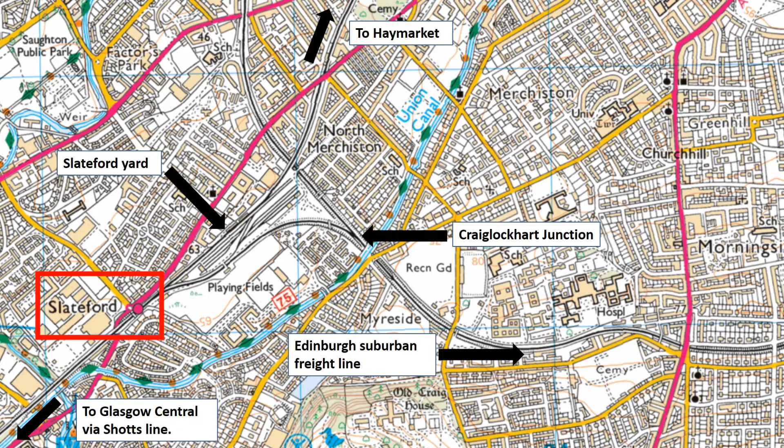Today we're going to look at the junction at Slateford Station, which connects the line via the Craiglockhart Junction to the Edinburgh suburban line, which is commonly used for freight movements and for bypassing the city centre.

A platform gauge is used to help set the platform coping stones to the track. It achieves this by measuring both the height and the distance from the outside rail running edge on a level between both rails. It can be used to both set the platform stones or check and measure their actual dimensions.

The platform gauge is both rigid and stable, whilst light and manageable as possible. It has handles and is balanced to enable one person to manoeuvre and operate it, with clear, simple and precise ruler settings. The gauge can be used with no fear of making electrical signalling contact between the two rails, so it will not affect any signalling equipment.

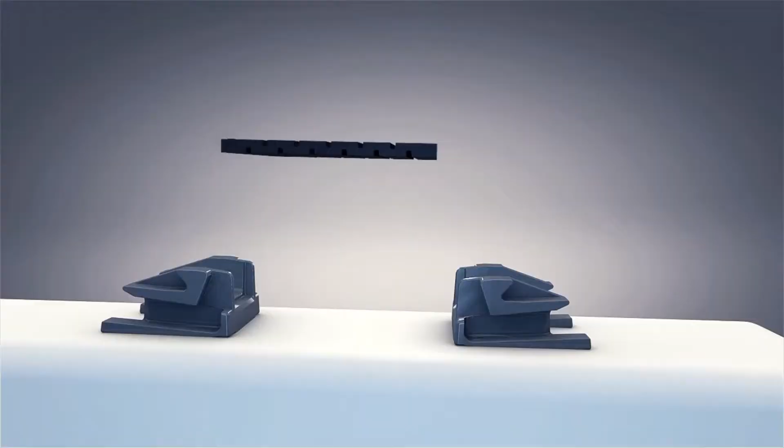You can see the track construction. They're using concrete sleepers here with fast clips. In the next couple of videos, I'm going to show you how the fast clips are constructed and also give you an example of a machine that could be used to install them on site. Note that the video of the machine is using steel sleepers rather than concrete sleepers, but the principle is similar.

Here you can see a drawing showing the layout of the signalling at Slateford Station, Slateford Junction, part of Slateford Yard, and then eventually Craiglockhart Junction, and then the site of the Craiglockhart Tunnel and the old Craiglockhart Station.

If we go back to the top right and look just to the left of the signal, we'll see a grey box with the numbers 249B, and this is the first of the S&C units that allows the trains to pass over onto the wrong side of the track via 249A, past the ground signal ES977, and then through S&C unit 248 across Slateford Junction.

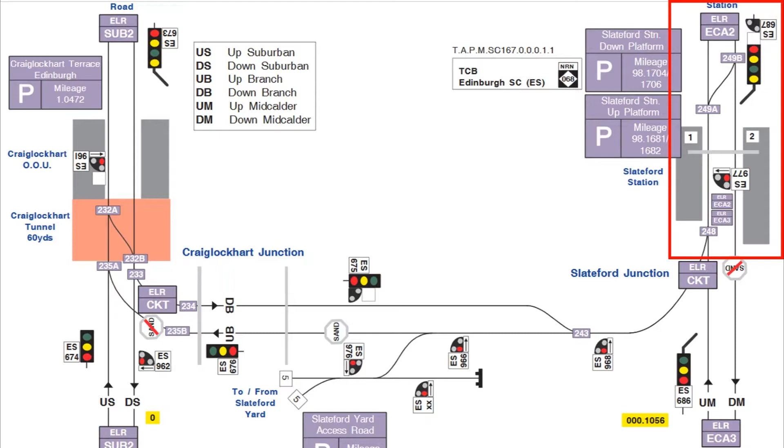So I've just rotated the image, and if you look down at the bottom left, the train's approaching the junction, passing signal ES687. They then cross over to run on the wrong side of the track past the ground position signal ES977, which shows the direction of that ground signal, across S&C unit 248 across Slateford Junction.

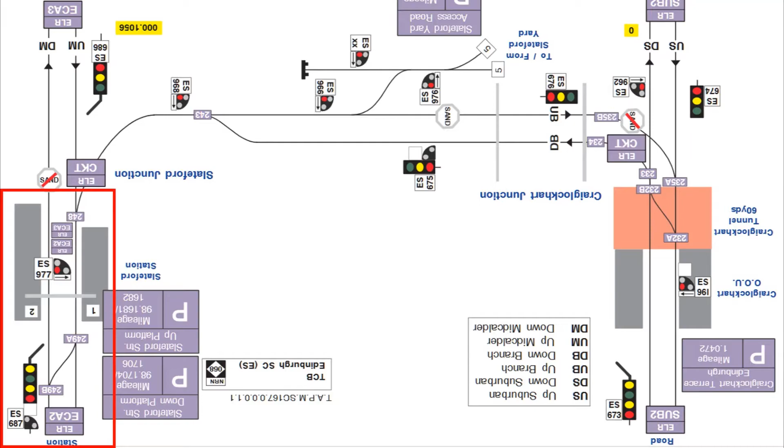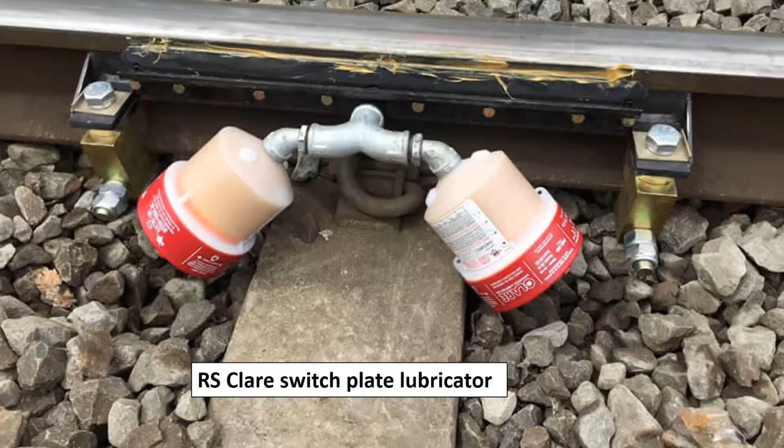This is a switch plate lubricator. Maintaining smooth switch performance is key to the safe and efficient operation of any rail system. High frequency use, coupled with wear and tear caused by mechanical movement, means that specialist switch plate lubrication is essential.

So as we walk up the track here, we can see the first ground position signal. If you look down at the bottom left, you'll see the lubricator. Then we can see the motor, the heater, the switch rails, the check rails, the stretcher bars and the rods. And again, there's the Clare lubricator.

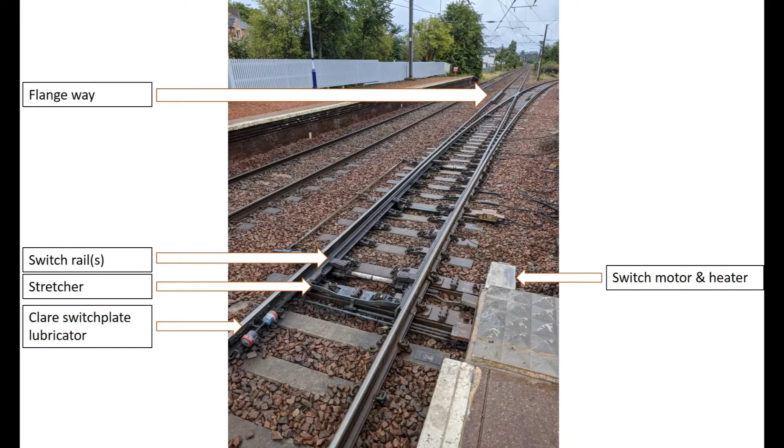The images shown here show S&C unit 248 close up, and what I've done is just annotate some of the major components to help you identify these when eventually you're on site and help you with your terminology. I've also now included a short video from Network Rail which helps explain the various components of an S&C unit and how they operate and why we need them on the railways.

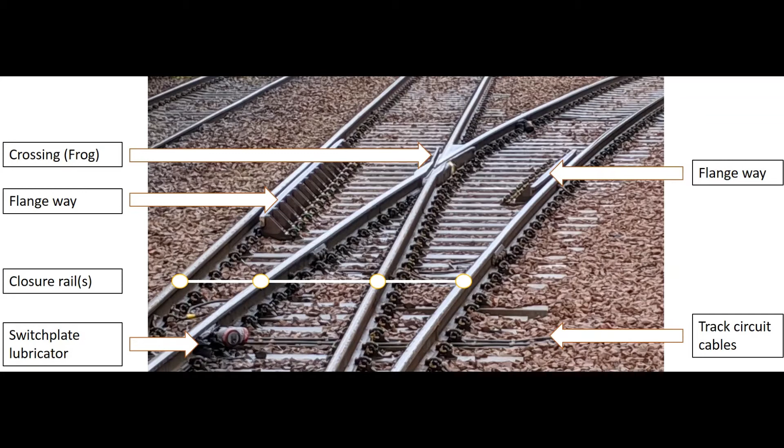Switches and crossings play an essential role in connecting the rail network. We use them to guide trains from one track to another and to enable lines to cross paths. Put simply, they're the junctions that allow us to create a multi-lined, multi-routed rail network.

At Network Rail, we own over 20,000 switch and crossing units. They come in many different shapes and sizes, and all are made to measure for their specific location.

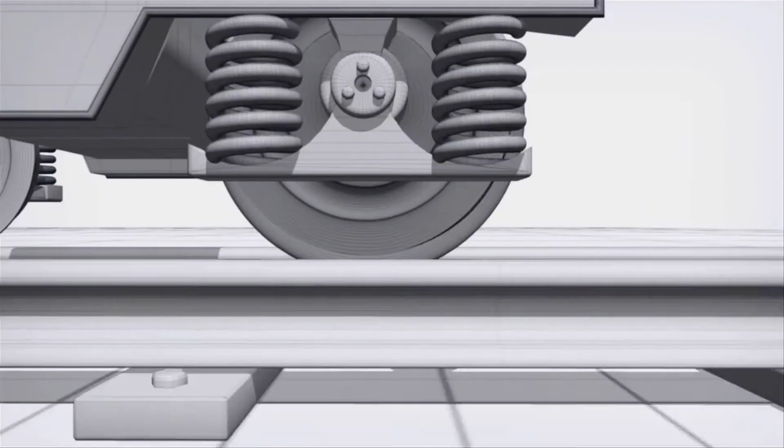To understand how switches and crossings work, we first have to look at the wheel-rail interaction. Train wheels move along the rails guided only by the pound coin-sized area of wheel that sits on the railhead. The wheel rim, or flange, doesn't normally touch the rail. Flanges are only a last resort to prevent the wheels becoming derailed.

A switch can guide a wheel in one of two directions. A crossing creates a gap in the rail for the flange to pass through.

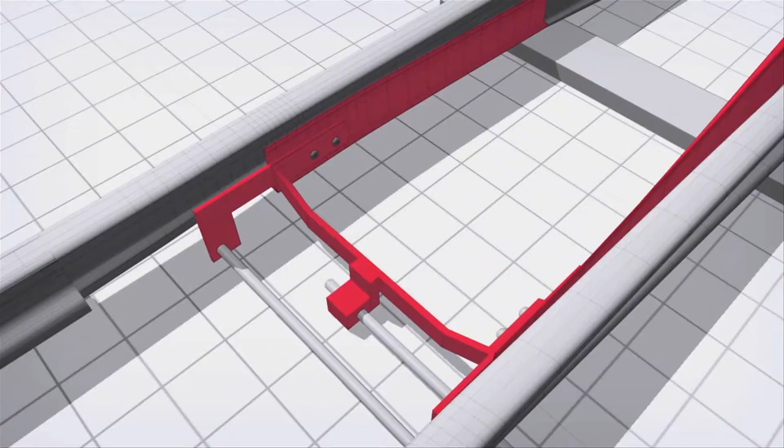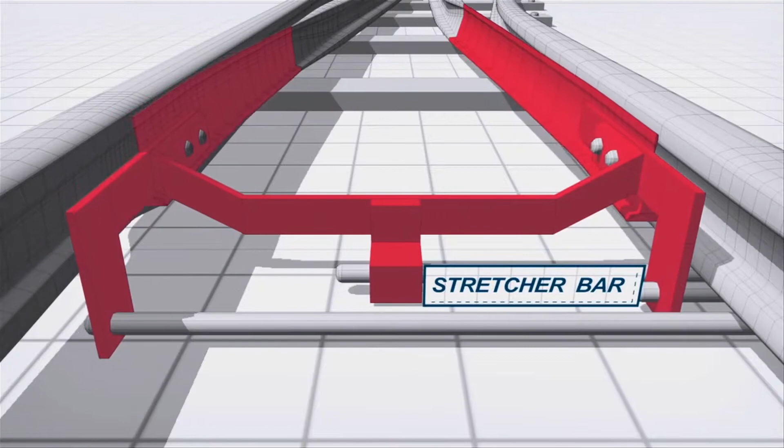This is a switch. Also known as a point, it's the moving part of the switch and crossing layout, and is made up of two long blades which can move across to guide the train one way or another. This is the switch rail, and this is called the toe. This is called the stock rail, a non-moving part of the switch. The two switch blades are fixed to each other by a stretcher bar to ensure that when one is against its stock rail, the other is fully clear and will provide room for the wheel flange to pass through cleanly.

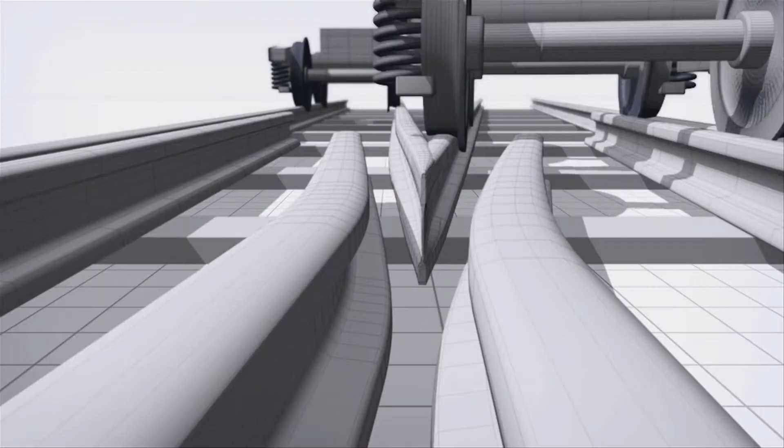This is a crossing. It's the non-moving part of the switch and crossing layout that allows a train to pass in either direction once the switch has been set. This is the nose of the crossing. Either side of the crossing area, wing and check rails are provided to assist the guidance of the wheel sets through the crossing.

Crossings can be either fabricated, made up of two machined rails joined together, or they can be cast as a single unit. Modern crossings are now cast from manganese steel, which is an advanced alloy that gets harder with use. This is an important property, as the nose of the crossing can take high impact loads as train wheels pass through.

My name's Lawrence Walton and I'm a graduate engineer working for Network Rail. I'm here today to teach you about switches and crossings.

The most simple form of S&C is the turnout. This is a left-hand turnout. As you can see, it diverges from the main route in a leftward direction.

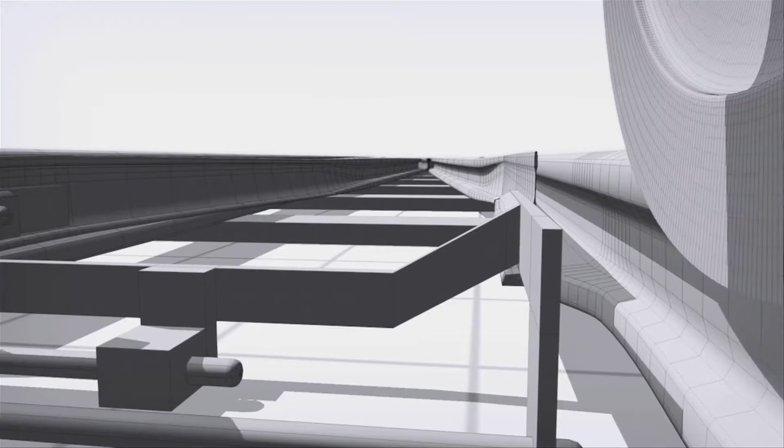This is how it works. In normal mode, the left-hand wheel rolls along the switch rail, and there's flangeway clearance for the right wheel to continue along the stock rail. The inside surface of the right flange is kept on course by the check rail.

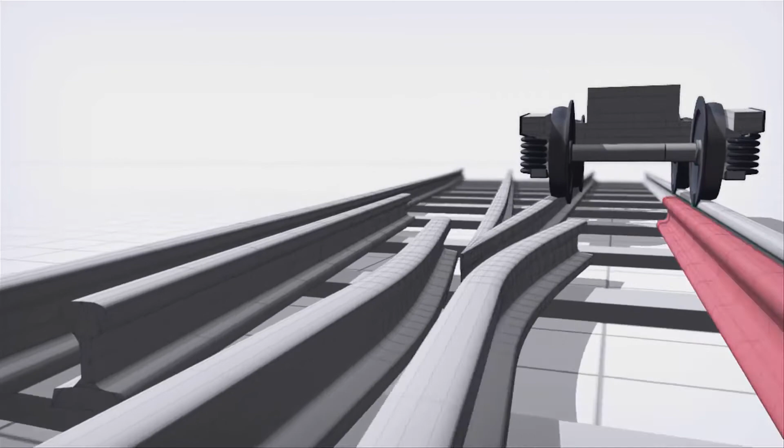This restrains the wheel set and ensures it is directed along the correct route. Meanwhile, the left wheel transfers contact between the different parts of the crossing. That's where there's a high impact load.

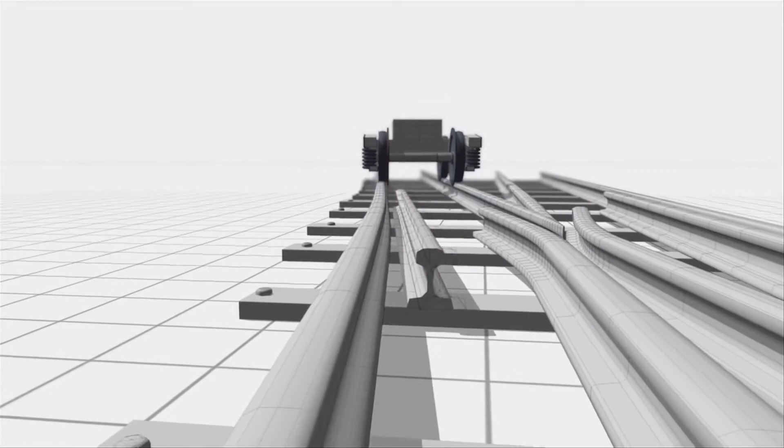In the reverse, the right wheel rolls over the switch rail and follows its geometry. The inside surface of the left flange is guided by the check, forcing it to follow the stock rail on the new route. And the right-hand wheel makes a crossing, again imparting a load on the crossing nose.

There are many different types of switch and crossing on the network. They include turnouts, diamonds, crossovers, and slip diamonds. The type we use is determined by a number of factors, including the number of lines involved, frequency of use, and running line speed. Trains travelling at high speeds need long switches and crossings. At low speeds, such as in stations, trains can make tighter turns.

Train movements across the network are set and controlled by signallers, who use switches to set routes for trains.

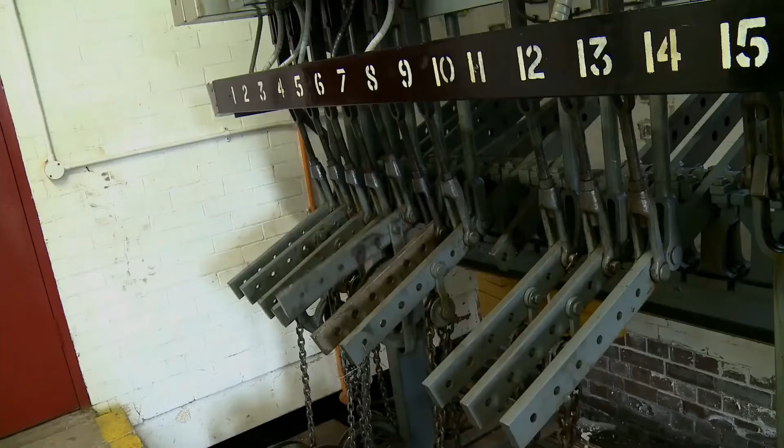Switches can be propelled by various devices. One of the simplest forms is the ground frame setup, a series of rods and cranks attached to levers in signal boxes.

These are now largely being replaced by remotely operated hydraulic and electromechanical devices, seen by rail sides all across the country.

This is an HW2000 points machine. This is electromechanical. What we have here is your drive motor. To check the motor has done its job, over here we have an interlocking and detection system.

Detection tells us when the points have completed their travel and locked. Locking holds the points in this state so they cannot be physically moved, so when a train runs over the top it remains in position.

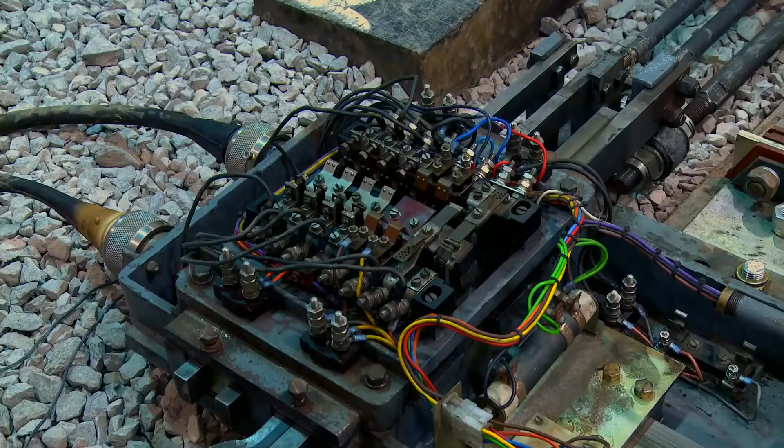Facing point locks are one of the most important safety features on the S&C layout. They ensure that the points cannot be moved when set. This is important because failure to lock the switches could cause a derailment.

As engineers, we face an ongoing challenge to maintain and improve our switch and crossing assets. Trains can create large impact and lateral forces as they change course, and these forces can cause wear and deformation. Switches and crossings therefore have a limited lifespan before we need to replace them.

Less than 5% of track miles are made up of switches and crossings, but over 17% of our maintenance budget is spent on them. We'll continue to research and develop new inspection techniques and material usage to increase their performance.

So now we're going to watch a Class 66 locomotive as it crosses over S&C Unit 249B, then on to 249A. It's passing along platform 1. Note that it's running in the wrong direction now.

The lights are flickering just because my camera is picking up the frequency of the lights. The naked eye wouldn't normally see this.

So now we're going to pass over S&C Unit 248, adhering to the speed restriction. And did you note the ground signal changing as the locomotive passed over?